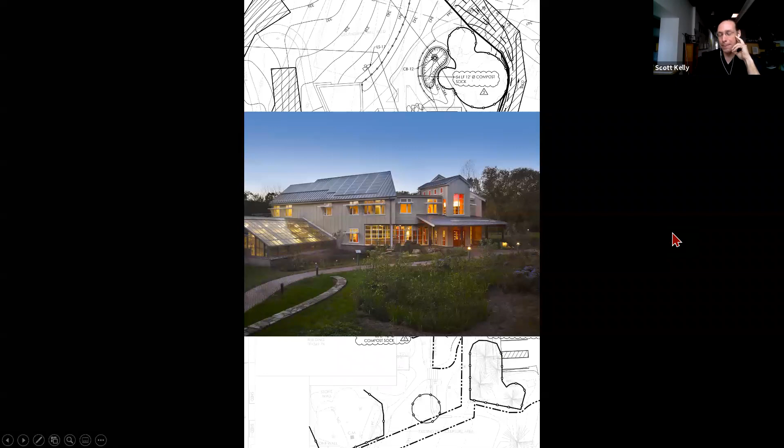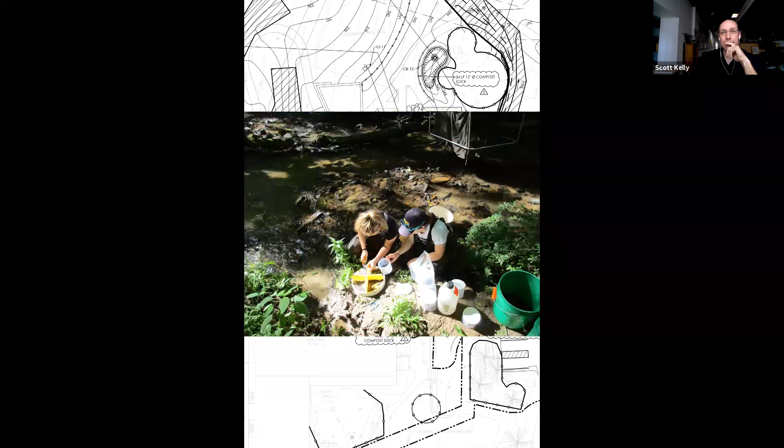Off we go. Since its founding in 1967, Stroud Water Research Center has focused on one thing: fresh water. Based out of its headquarters in southeast Pennsylvania, its scientists and staff have worked all over the world seeking to advance knowledge and stewardship of freshwater systems through global research, education, and watershed restoration.

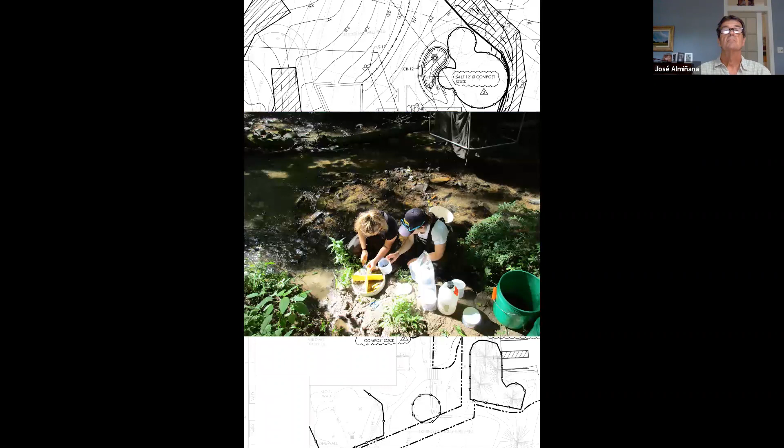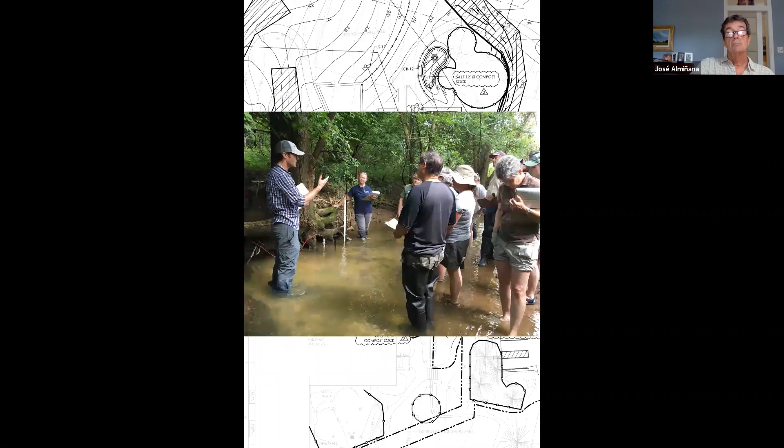The Moorhead Environmental Complex expansion to its headquarters was conceived as a place to provide needed space that could showcase the center's research and to demonstrate the research findings through education and hands-on restoration of watersheds. The project's theme, Getting the Water Right, guided the design, placement, and construction of the building and its campus-wide water treatment systems and the daily and long-term operations of the facility.

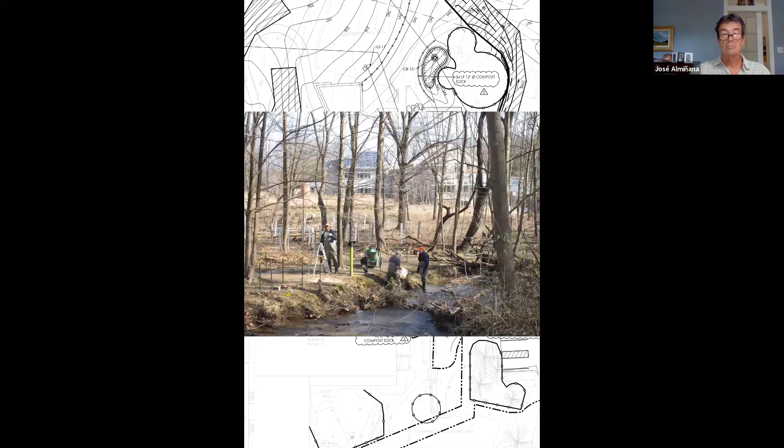The result is a comprehensive, innovative collection of systems to better manage rainwater, treat wastewater, and utilize roof rainwater for the property that exemplifies best management practices, BMPs, that protect clean water by managing it on-site at the source. A collaborative team of owner, architects, engineers, and landscape architects, many of whom you will meet today, worked to integrate the building into the landscape.

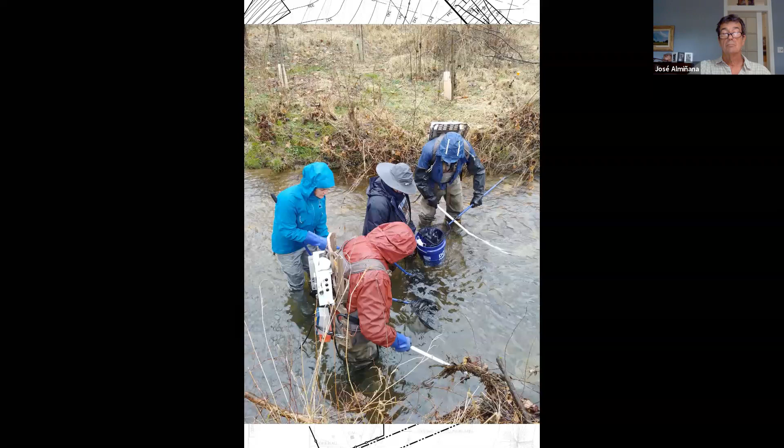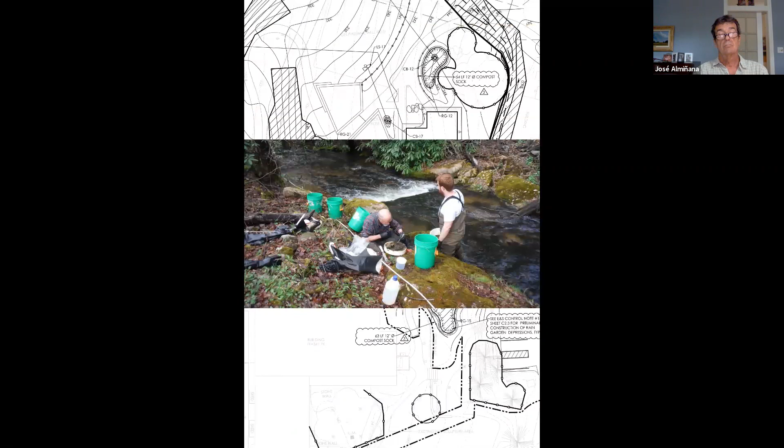Stroud Center set project goals focused on reducing groundwater withdrawal, reducing organic and nitrogen pollution from septic wastes, and returning the site to natural forest function by managing stormwater runoff and infiltration. To achieve these goals, the team started with understanding the site's natural resources and current conditions, investigated water uses on campus, and explored alternate solutions for managing stormwater.

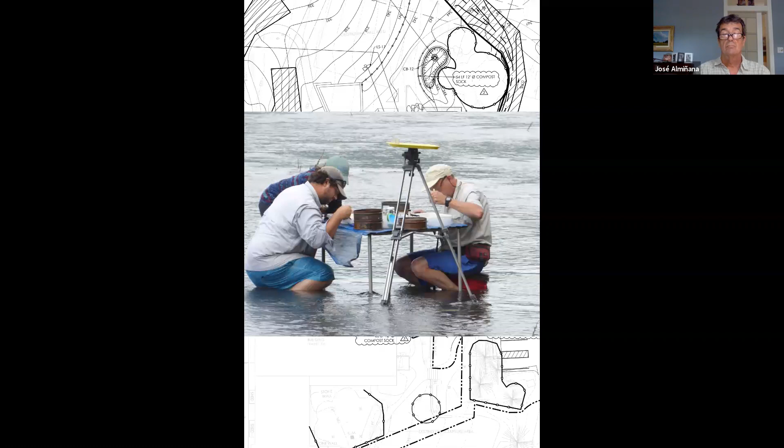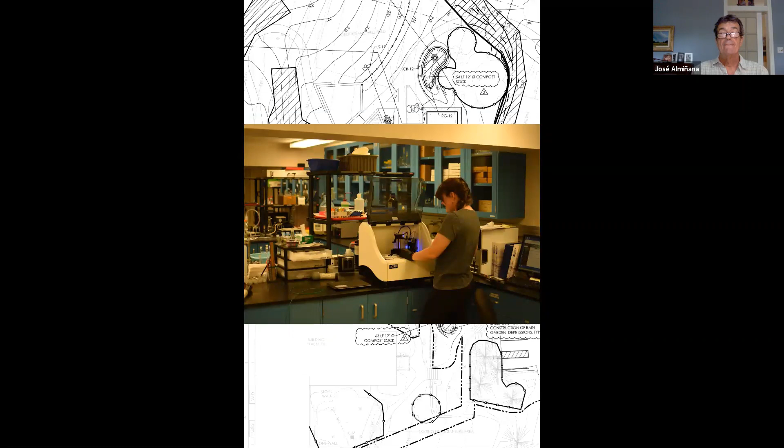The project has been successful. The campus buildings increased by 16,000 square feet with a mere 5% increase in water consumption. Testing of the drip irrigated wastewater effluent shows that the quality is better than the local groundwater. The project's green features have been an important educational resource for the Stroud Center's education programs and as a demonstration project for the green building community. All of this while earning LEED Platinum certification along the way.

During a typical year, the Stroud Center welcomes busloads of students to the complex to explore freshwater science in the lab and the stream. To meet the distance challenge that COVID presents, the center has launched a Learn at Home virtual learning resource program for teachers, students, and families to explore water-related topics. Hopefully soon, the Moorhead complex will once again teem with activity.

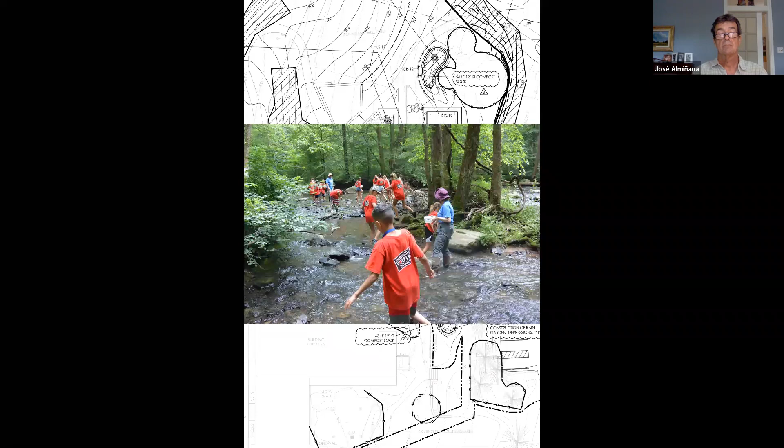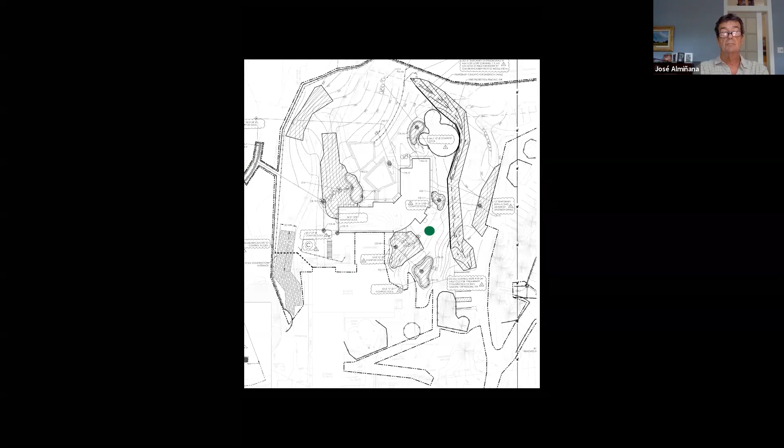Before we meet our speakers, we'll take a short tour of the Moorhead complex and the campus to acclimate you and hopefully inspire discussion and questions. A staircase leads us down from the main parking area to brick paths that connect the original buildings to the Moorhead Environmental Complex's main entrance.

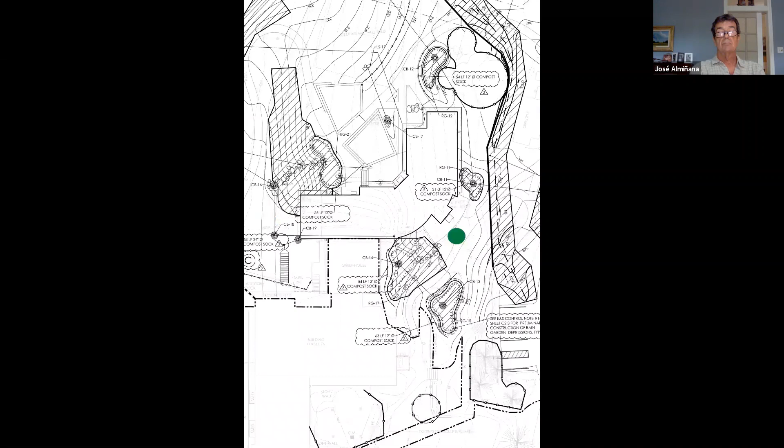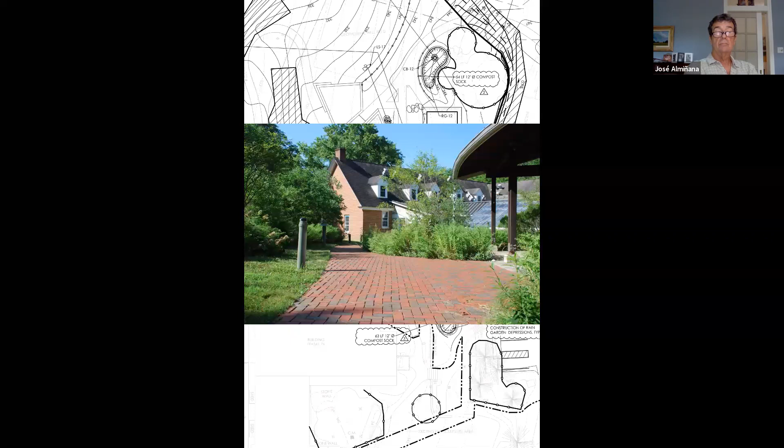These porous paths are designed to infiltrate stormwater and channel it to bioretention areas or rain gardens that flourish on either side of the path and along the entire front facade of the complex. Densely planted with native perennials, shrubs, and trees, the rain gardens slow, retain, infiltrate, and, in the case of large storms, drain stormwater through overflow piping under the building and into the rain gardens and fields in back of the building, mimicking the natural flow of stormwater down the hill to the east branch of the White Clay Creek.

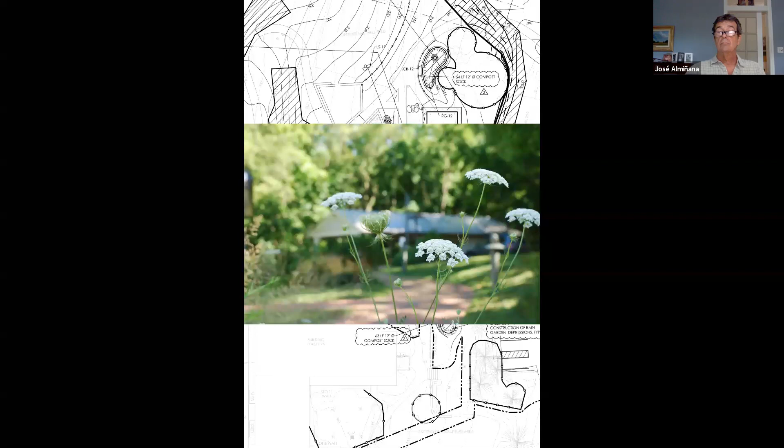A few things to note. The greenhouse marries the existing building with the new. This multifunctional greenhouse space houses artificial stream channels for research, an algae farm, and other experimental systems. The greenhouse connects the older building to the complex via an elevated walkway that acts as a bridge between the research and education functions of the campus.

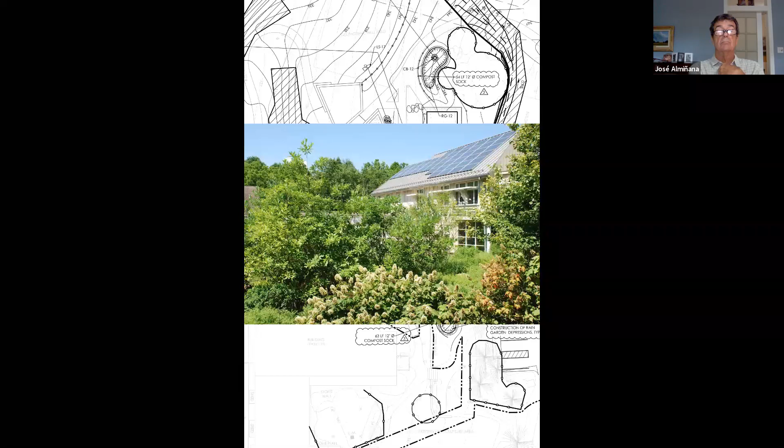The greenhouse also presented a significant design challenge for the collaborative team to minimize impacts on the greenhouse's shading and space needs while enhancing connectivity between the facilities.

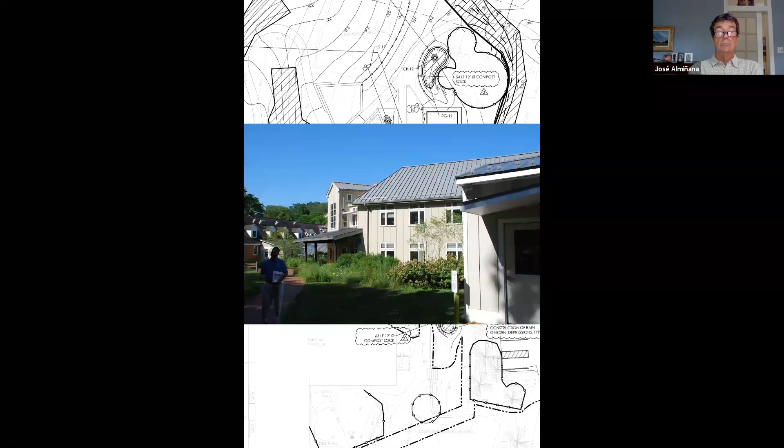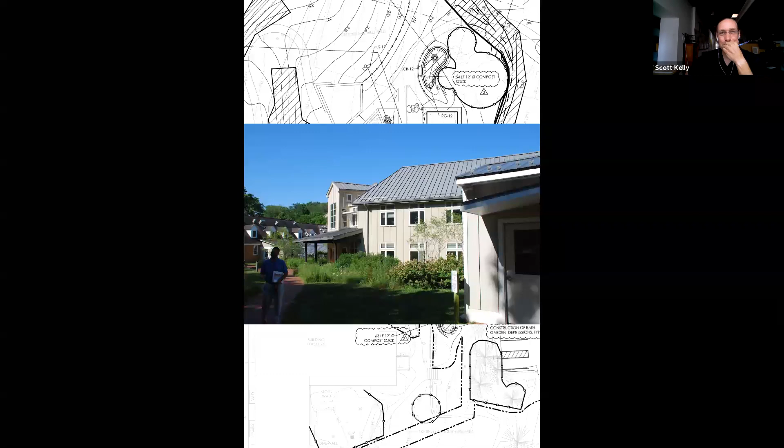A metal roof covering the new building was selected over other roof types to reduce contamination of rainwater collected for reuse in the facility. The rainwater capture system was designed to divert the first 0.1 inch of rainwater away from the water reuse cisterns, since this first flush often carries dirt and debris that collects on rooftops between storm events.

This helps improve the water quality collected for reuse within the building. The rain chains and sculptures showcase nature-based art and add beauty and a sense of whimsy to the campus.

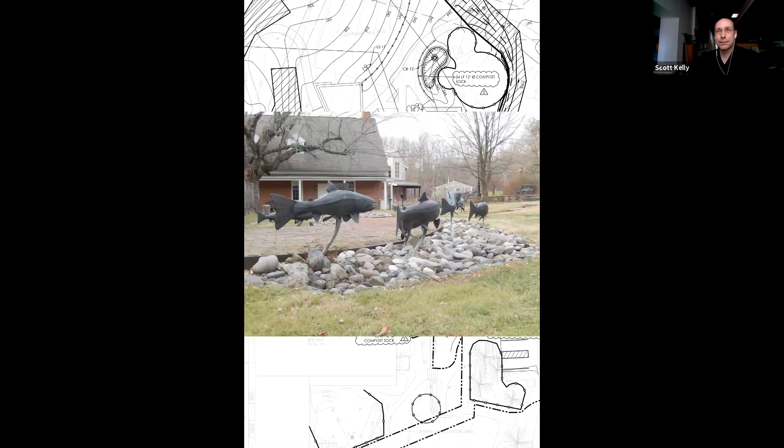The tour continues on the rear patio. Stroud uses a large wooden barrel to demonstrate rainwater capture to the public. The rain barrel provides a source for garden and grounds watering.

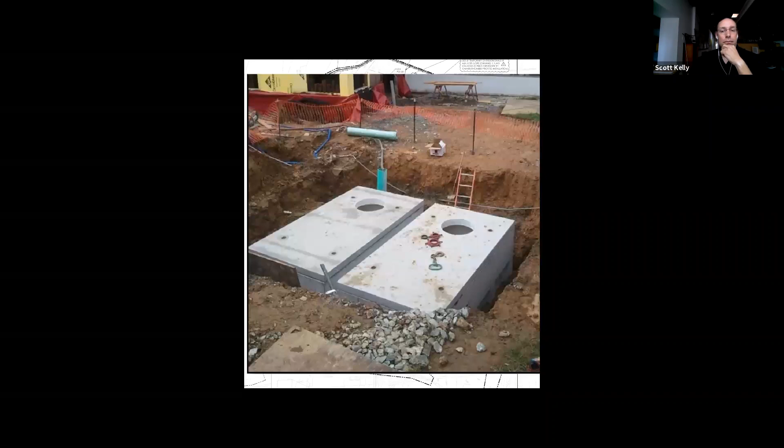Overflow from the rain barrel and other roof areas is collected by two 3,000-gallon cisterns that capture and retain roof runoff for on-demand use in the facility's toilets, and can provide the center's water treatment system with water for high-quality treated water to its chemistry and other analytical research labs.

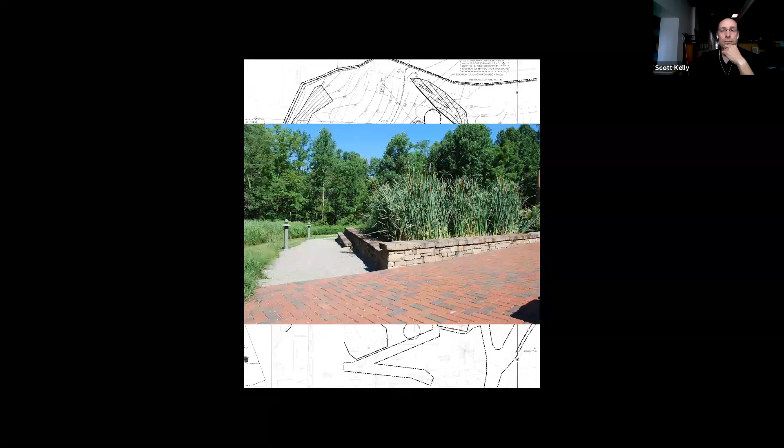100% of the effluent generated at the complex is treated in a constructed wetland wastewater treatment system located on the main patio, directly outside classrooms, the conference room, and administrative offices. It is, in essence, a working centerpiece garden.

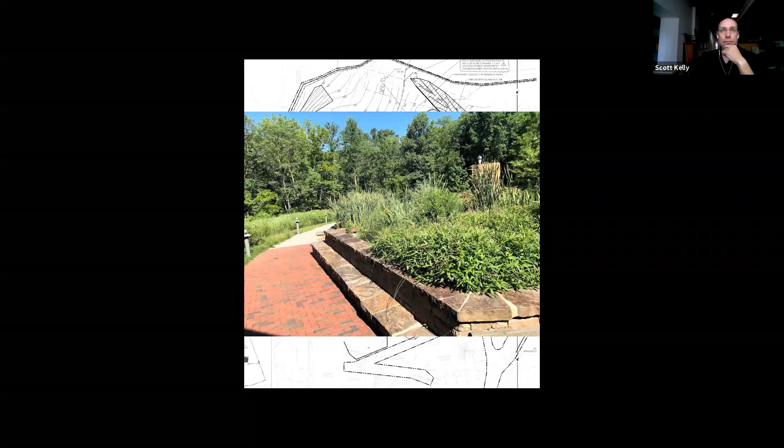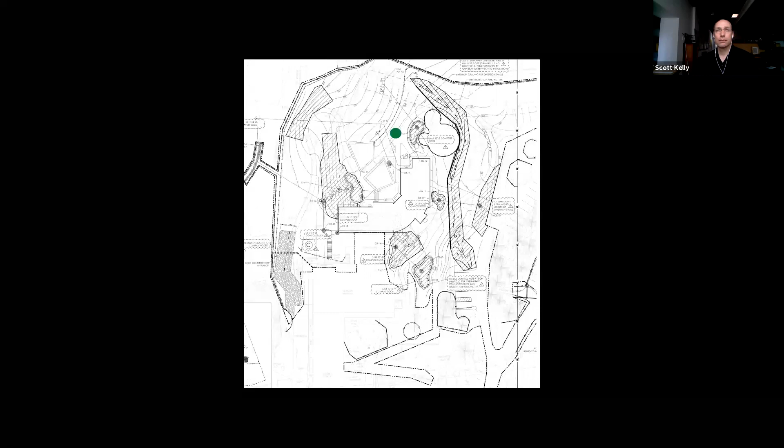Two wetland cells that look like raised water gardens receive wastewater input from the primary treatment and equalization tank and treat it by moving the wastewater multiple times under the surface through a pea gravel medium. The plant roots and microbes filter pollutants, including nitrogen.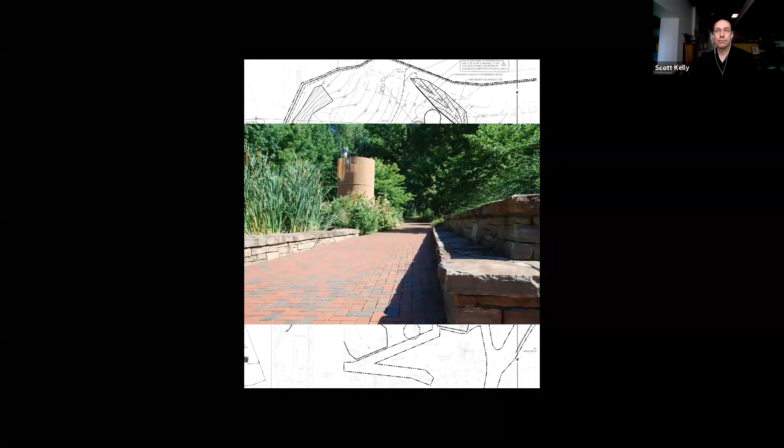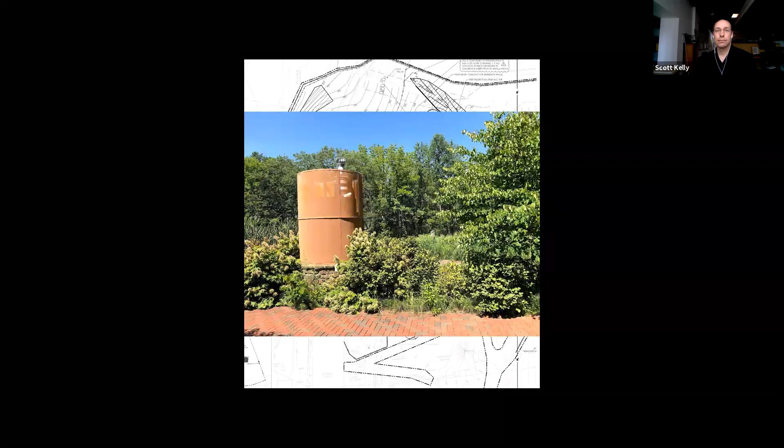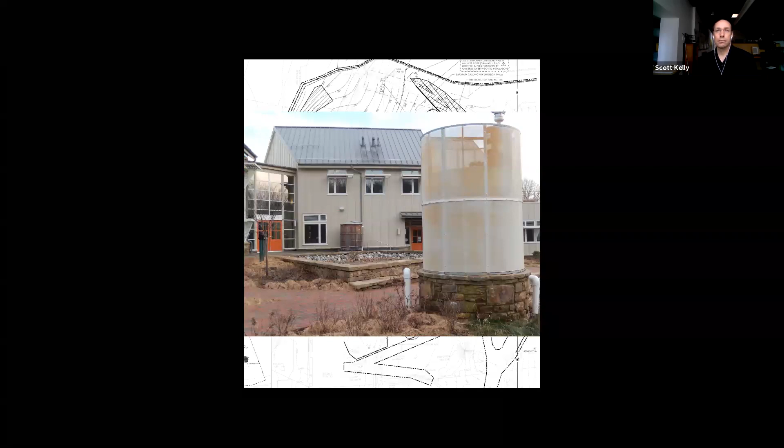After treating the water in the wetland system, the filtered water is pumped uphill to a 2-chamber recirculating sand filtration bed for final polishing, then to an underground drip irrigation system for infiltration into the soil. This 4-zone drip system runs through a half-acre field containing about 1.5 miles of drip irrigation tubing.

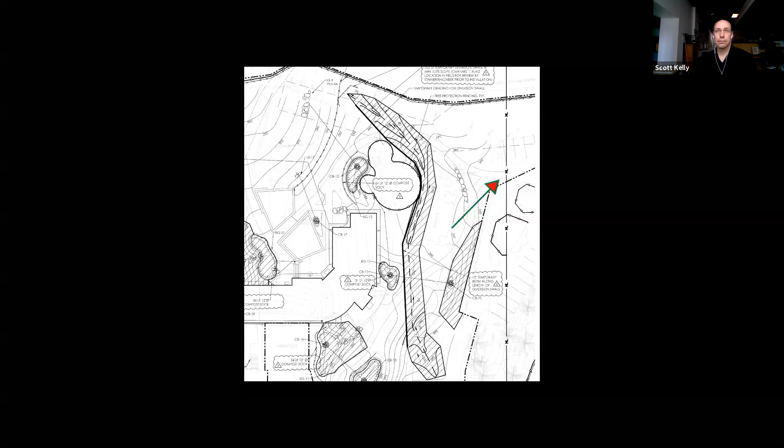5 observation testing wells are used to monitor groundwater quality: 1 above the field, 2 directly below the field, and 2 below the old, now decommissioned septic drainage fields.

The Stroud Center conducts periodic testing on the polished water and has found that the system removes more than 90% of total nitrogen. Basically, the water is cleaner than the groundwater in the field to which it's dispersed.

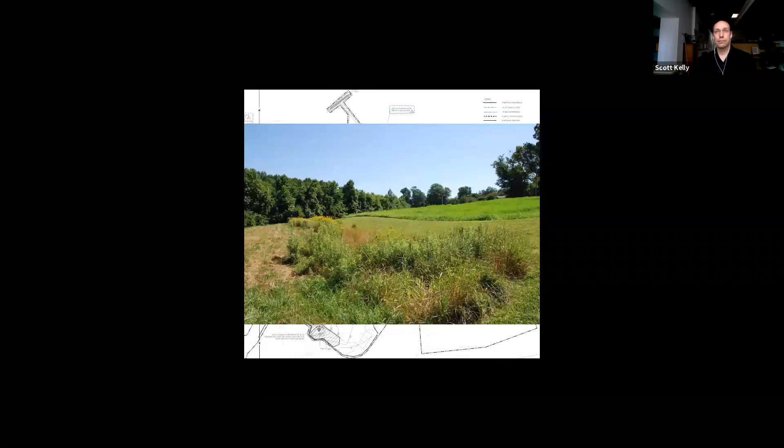Most of the pictures in this overview were taken during a brief, socially distant visit that reunited the team for the first time since completion of construction.

Today we bring them back together to talk about the successes and failures of the collaborative process, challenges, opportunities, and lessons learned from operating one of the first natural systems in the country, and a celebration of the influence this project has had on others. I would like to welcome to the roundtable Dave Arscott, President and Executive Director of the Stroud Center, Scott Kelly, Principal of Revision Architecture, Michelle Adams, Principal of Meliora Design, and Jose Almañana, Principal of Andropogon Landscape Architecture.

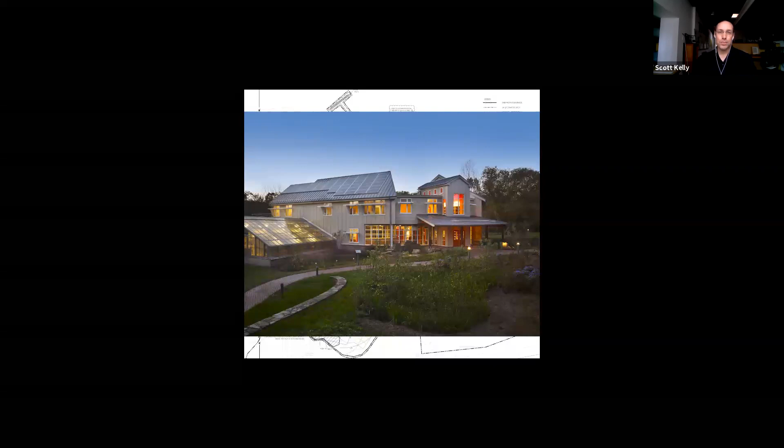All right, we got through that with only one glitch. That's pretty good. Since its founding in... let me see if I can go one more slide.

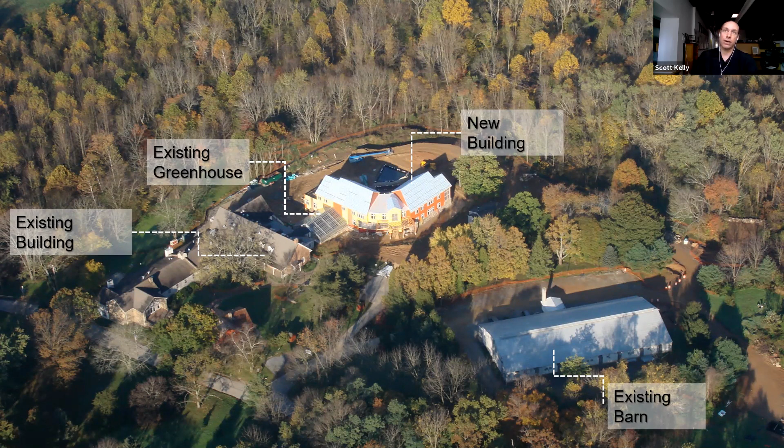There was also a lot of comprehensive land planning done ahead of time. We're not going to get into all of that, but this image just represents a bit of it, where you can see the pathways down from the former barn to the new center. All of that is really for context.

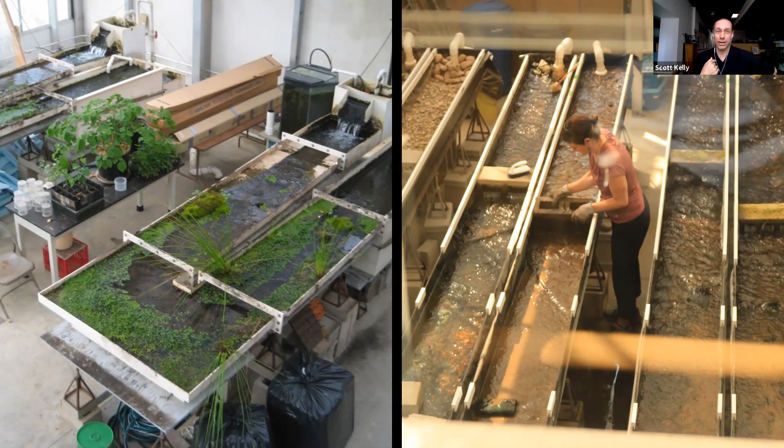I wanted to put up one other thing: an image of these stream tables — if I'm saying them correctly, Dave? What's the correct terminology for these? You're muted, Dave. I call these stream tables. Yeah, the one on the left is maybe a stream table, or experimental stream channels, or flumes.

They're all flowing water. This gives you a pretty good idea of some of the work done inside that greenhouse. We're able to bring stream water into our facility from White Clay Creek and use it for experimental purposes, which is quite critical for our research program here at the center.

Very briefly, this is what I'd consider the south facade. I'm an architect, and a couple of the people on this presentation are also architects. You look at this building, and the first thing most architects see is not the water, they see the photovoltaics on the roof. That tends to be our perspective.

But we really have to remember that the key to projects like this is that the site is the place that supports the building. It's not that the building is there because of the site, so it's a little bit of a reversal. Let's go on to one other image. This is the north side, really where the entrance is with the greenhouse. All of that is for context.

Briefly, the team did put together these diagrams, and any of you are welcome to jump in and explain this, because you'll probably do a better job than I will. This is the diagram that explains how the stormwater flows through the site, coming from the parking lot on the back side of this building, working its way around, going through some filtration methods, and then back to the level spreader on the left. You see rain coming from the roof, going through the rain barrel, going through the runnels on the site, which are beautifully crafted. That's one of my favorite details, Jose.

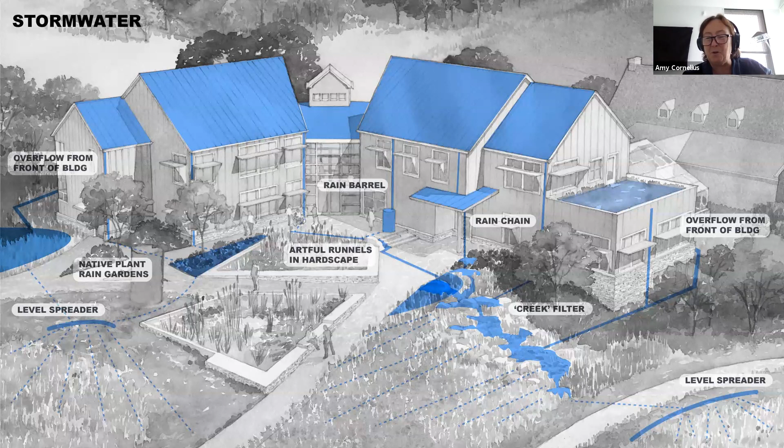Scott, yes. Hey Scott, Michelle has a point that we should point out where the creek is. Where is the stream? Behind us. Yes, but I think in one of those overheads you probably had a good picture of it.

Let me go off script here a little bit, and I'll go back to that overhead. So if you see where most of these pictures are taken, they're here, but the White Clay Creek is a few hundred feet off to the southish. That's, if you can see where my cursor is moving, the location of the creek.

Hey Scott, maybe I could go off script and jump in here too, because this is a great slide to explain. So the Stroud Center has been at this location for our entire existence. We started in 1967 as a field station at the Academy of Natural Sciences of Philadelphia. We're now our own 501c3 nonprofit. But the building closest to the stream at the bottom left corner of your slide is an old stone barn that's closest to the road.

And that was renovated in '67 to be our first research building. Since then, our expansion projects have moved upwards in this picture, not exactly north here, but to expand our square footage to a total of about 55,000 square feet of indoor space. You'll see we're really close to White Clay Creek. This is a federally designated wild and scenic river corridor, and we've been studying that stream for our entire existence, 52 years now. So this is really critical to who we are and what we do.

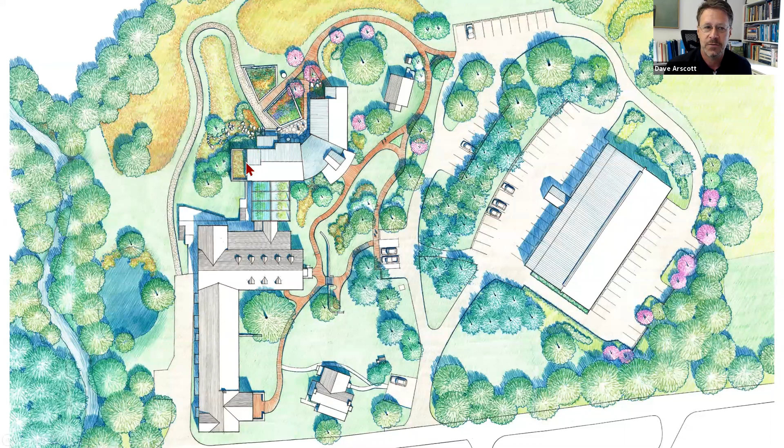We wouldn't normally be building a large building like this so close to the creek, but to get the water right, the new building has about 10% of its footprint in the FEMA floodplain. So I want to note that now, because that's one of the challenges I think we'll talk about later on. There was a lot of discussion during the charrettes about the placement of that building and how we bring it back and still accomplish the mission of Stroud.

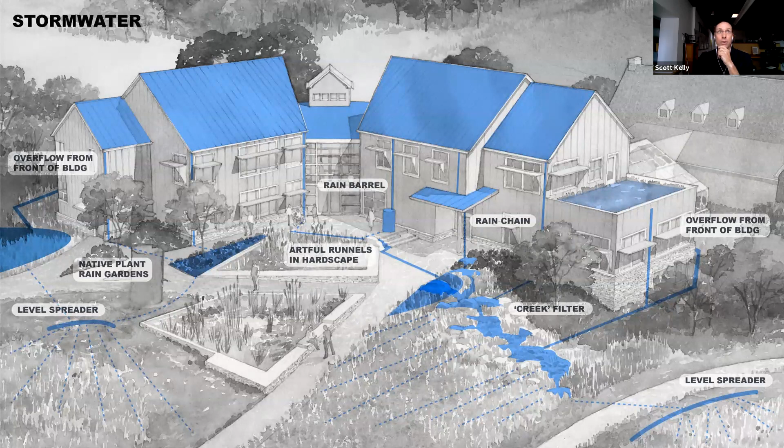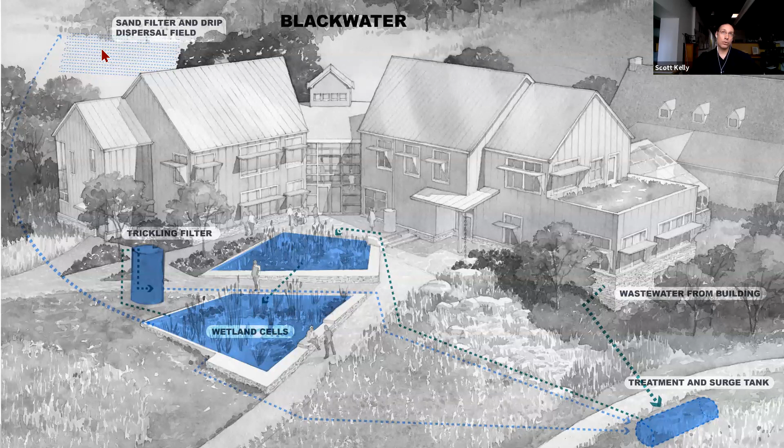Okay, let me jump a few slides ahead. That was a little bit on the rainwater, the stormwater, and here's a little bit on the black water. What we're doing is taking all the wastewater from the building, putting it into a treatment tank. It's getting its first level of treatment, pumping it uphill into these wetland cells. There's two of them, and you're going to see some photos and have some more discussion about them later. It goes through some filtration, and when it's clean, it's pumped way up to a sand filter and a dispersal field.

One of the things that Amy noted in the presentation is that the water going back to the aquifer is cleaner than the water of the aquifer, which to me is exactly what we were trying to do.

We're in a locale in Southeast Pennsylvania that's had farming in the landscape since the early colonization period, so we have a legacy of agricultural influences on our groundwater quality, particularly nitrogen content being a little high. Still drinkable, still potable for nitrogen, but the treatment process removes about 90% of the total nitrogen, resulting in a concentration lower than what we find in the groundwater monitoring wells near that drip field.

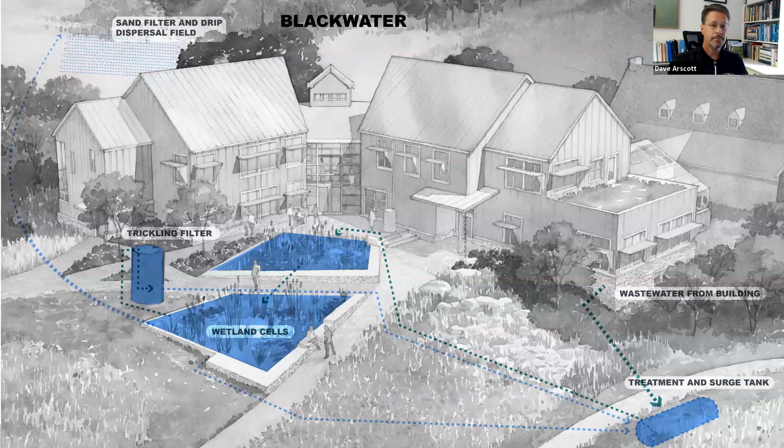Moving on, we're going to have some conversation around these topic areas: the successes and failures of the collaborative team, the challenges and opportunities of operating a natural system. We're trying to mimic nature, and that can be very hard to get right. We'll cover some lessons learned from the project and celebrate some of its influences, then probably open up to general questions.

I think we really need to start with you, Dave, because you're the man of the hour, and we need to have a quick conversation on how we should define getting the water right. From your perspective, what does it mean, getting the water right?

Well, first and foremost, as I've already shared, we're a freshwater research organization. We educate the public and work with landowners to consider best management practices that protect water quality in streams, rivers, wetlands, and entire watersheds.

We have a long history at our current location in Southeast Pennsylvania in Chester County, and as mentioned, we're on the banks of the wild and scenic White Clay Creek. We're out in the rural countryside, so we're not serviced by municipal water utilities for drinking water or wastewater. We depend on groundwater for drinking.

Prior to the project, we had a wastewater treatment system, a traditional septic tank and drain field, that was nearing the end of its life. So that needed to be addressed.

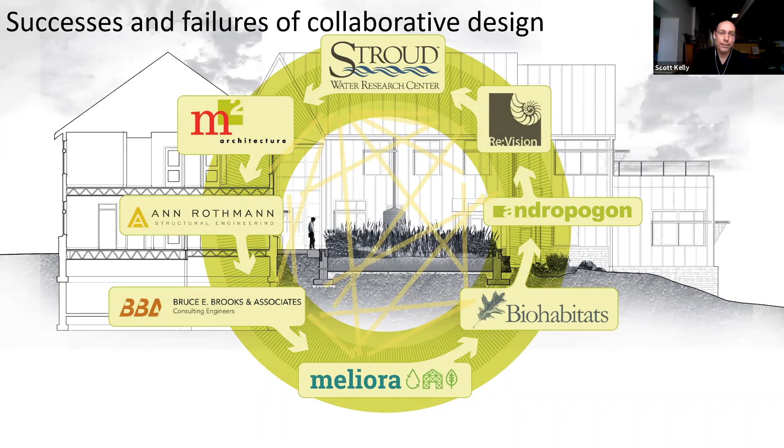Well, a couple of members in the audience have talked about the siting of the building. If you look at the entire development footprint of the site in terms of the collection of buildings that exist there, proximity to the creek was important from the perspective of a resource. The basic land available tends to be flatter, closer to the creek, so it was easier to develop. I'd venture to suggest that this was one of the reasons why the development happened that way.

It happened in successive stages, so there were additions to buildings, very much like you see in old farmhouses, with the additions being on either side of the house, most likely on one side. And then eventually we had to come up with this location for this building.

Orientation, solar axis, understanding gravity, and the movement of water through the site led us to where we are, which is interesting because the building became a dam in terms of the movement of water from the uplands to the receiving waters and the east branch of White Clay Creek.

So lots of things had to be done to manage the water coming from uphill, to find places for it to be infiltrated, and places for it to overflow and find its way down towards the creek. By reducing the amount of runoff generated by the new development, we were able to minimize the necessary infrastructure to keep the building dry and actually construct this.

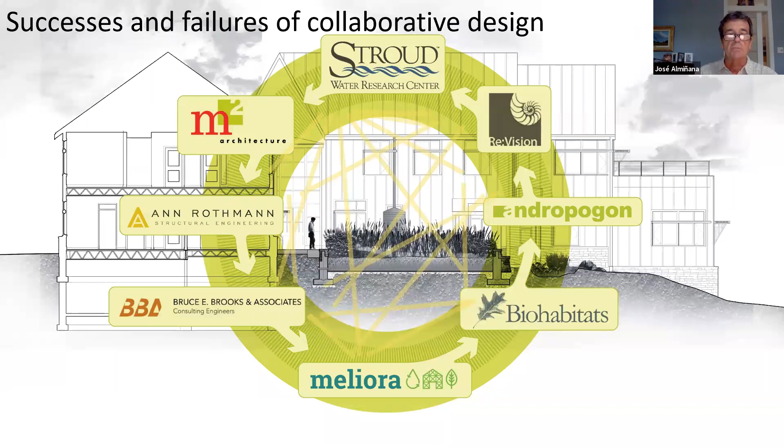And lo and behold, the project that started out just being a well-designed and well-conceived project ended up getting the platinum certification. I think that's part of the fortuitous evolution of the project, but I'm a firm believer that you are always in control of your destiny, and you put yourself in the right place for this to happen, and you interact with people in a way that makes things better. This was extraordinary in that regard.

These are a couple of images that show when we all came together in the very beginning to flesh all this out, to go through all the details, to have the interaction between the design team and the scientists.

People always talk about having the right experts in the room. Everyone on the design team realized one thing: the design team weren't the experts. It was the water scientists we were in the room with that were the experts, and we all had to listen very carefully to them. Sometimes we needed to be told two or three times until it finally stuck, but it did, and that's part of what made it so successful.

Michelle: I wanted to reinforce Dave's point, because Stroud didn't just have client representatives engaged, their staff were engaged, so the people who would live in this building were part of the design and knew what they had when we, as the designers, went away. Also to reinforce Dave's point, if we'd had more involvement from the contractors during the design process, I think that would have been helpful, because building it is so important.

Mason was brought on a little later. Dave: I'll add, to emphasize what Jose mentioned, that the Stroud Center didn't enter into this project with the idea that we're pursuing LEED Platinum certification. This evolved as incremental decisions were made to improve conditions at the Stroud Center.

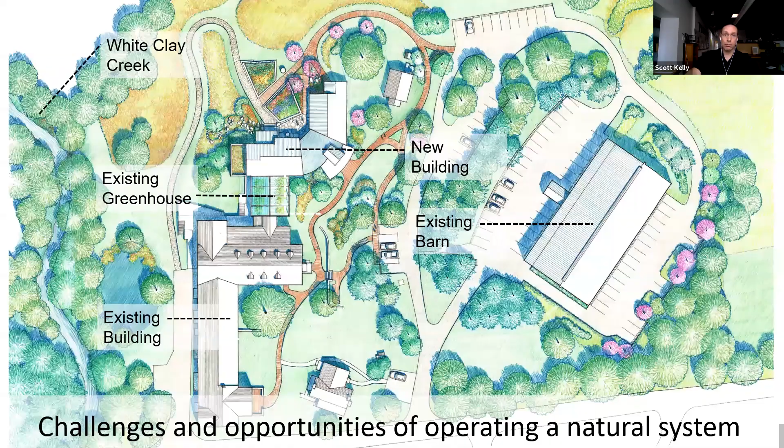Moving on, we should talk a bit first about the siting of the building. Brad is asking if there could have been another spot to put this building to prevent pumping the effluent uphill, and what that did to overall energy use and LEED certification. But maybe also talk about the constraints of the site. Michelle, do you want to take that one?

You're muted. There we go, sorry about that.

Sure. Well, the existing building had the on-site septic system that already had to be pumped, and we were connecting to the existing building. So we were in a situation that, in order to stay down there with the existing building, we would have to pump up to the better soils to dispose of the wastewater.

I don't have any information—I don't know if you do, Dave—on the energy associated with that. I have some anecdotal info, but fundamentally we're in a situation where we're not going to be able to infiltrate between this building and White Clay Creek. It's not feasible, so we already know that.

Right, so we know we're already going to be pumping uphill. I know from other net zero energy projects we've designed that pump energy can be significant. So you just have to be very careful—even the size of the actual pipe has resistance in it and will influence the size of the pump.

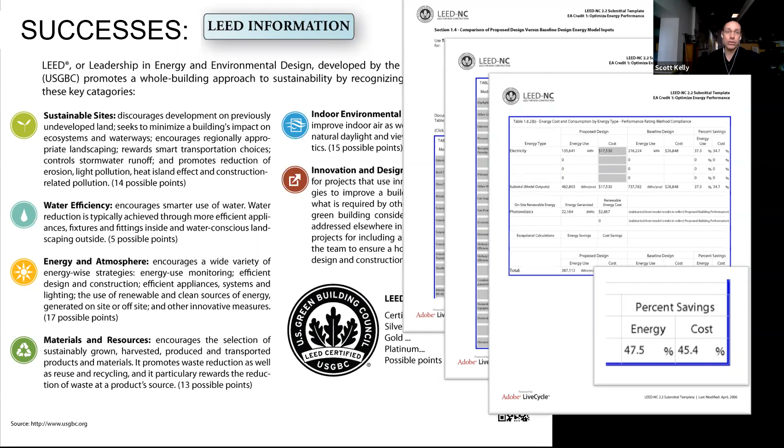Okay, let's go on and talk a little bit about some of the influence of this project. We've already touched on some, but this project did have some strong influences, I think, on policy and on Stroud's ability to help others through this regulatory process. Can you tell us a little bit about that?

Well, maybe not so much through the regulatory process, but certainly we are open for sharing and teaching others about what we've built here and what the process was at the time we built it, almost 10 years ago. So we've had many tours and interested parties coming in that are considering either a green building or a LEED certified building, wanting to see aspects of the facility. I think quite a bit of interest has focused on the stormwater management aspects of what we have here.

Yeah, so I understand there were some on the team that are also quite heavily involved in U.S. Green Building Council and LEED certification, and there's some influence of the water aspects of this project on future iterations of LEED certification that maybe others can talk about.